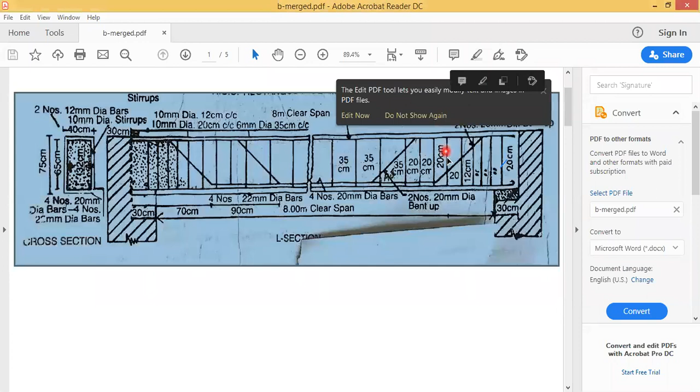And for the remaining length, it's 350. So for 350, you have to calculate how many numbers of bars are there. You can't count because they have shown a continuity symbol, and whatever number I have counted, that is only for one side. For the other side, you can multiply by 2.

Now come to this cross section. Total depth is 750 mm, and to the center of the diameter, or leaving the cover, it is 650 mm. So what will be the top and bottom cover? It will be 50, 50 at the top and bottom, so that you get 75 total.

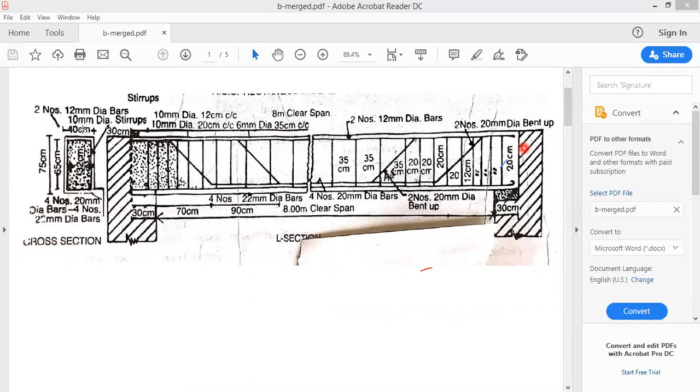And then breadth is 400 mm, and inside you can see 32 they have written, so that means cover is 40 minus 32, you get 8. So distribute on either side, it is 4. 4 centimeter means 40 mm it is. So top and bottom cover is 50. Side covers are 40 mm.

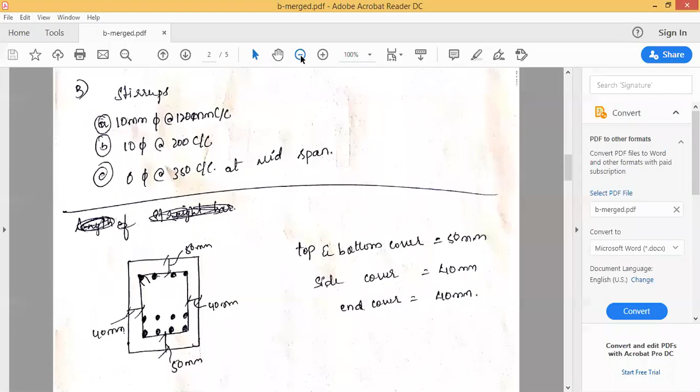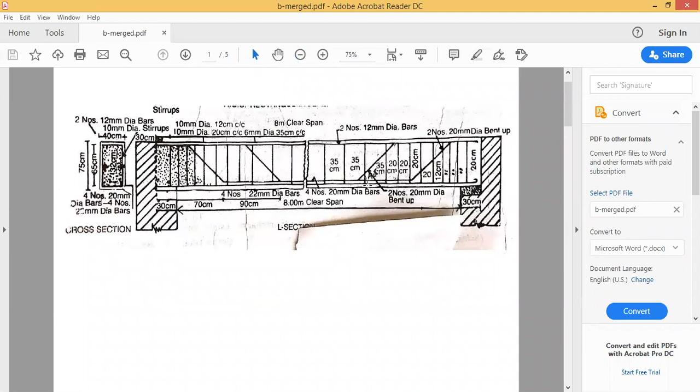Next, we shall see types of bars. I told you the main bar is a straight bar at the bottom, 4 number of 22 dia, and bent up bars, 4 number of 20 dia. It may be bent up at different distances, but it is bent up within this beam only. So if you calculate one bent up bar, you can multiply it by 4.

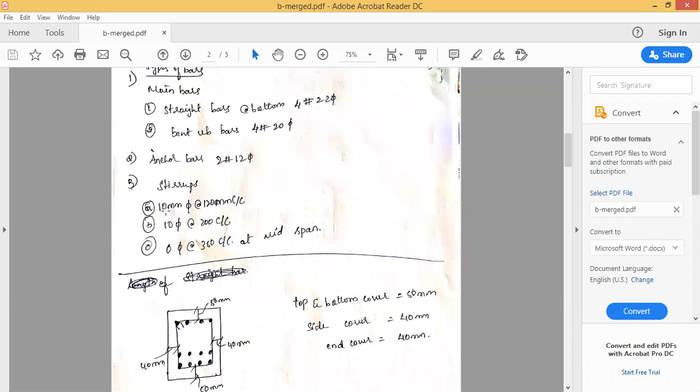And then we have anchor bars, 2 number of 12 dia, which is at the top. And then stirrups, again spaced at different spacing, and the dia is also different. 10 mm dia at 120 mm center, that is here. Then again 10 dia at 200 center, and here it is 6 dia at 350 mm center to center. So here they have given the dia of the stirrups: 10 dia at 12 centimeter center to center, 10 dia at 20 centimeter, and 6 dia at 350 center to center. So you can see the dia of the bars and spacing here.

Now this is the figure. So top and bottom cover in cross section is 50, 50, and side cover is 40, also called end cover as 40 mm. This problem is in Datta textbook, page number 232.

First, let's calculate the length of the straight bar. There are 4 number of 22 dia. I have directly written here, not used a formula. I think you're familiar now with this.

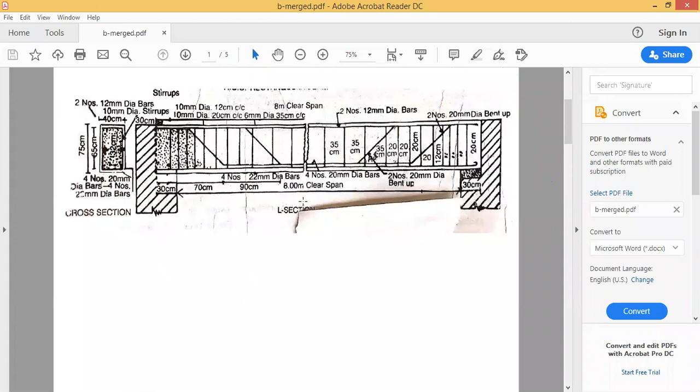So length equals spacing, clear span is 8,000, plus bearing which is 300 on either side. You can see it is 30 centimeter, 30 centimeter, so it is 300 on both sides. What I did is 8,000 plus 300 plus 300.

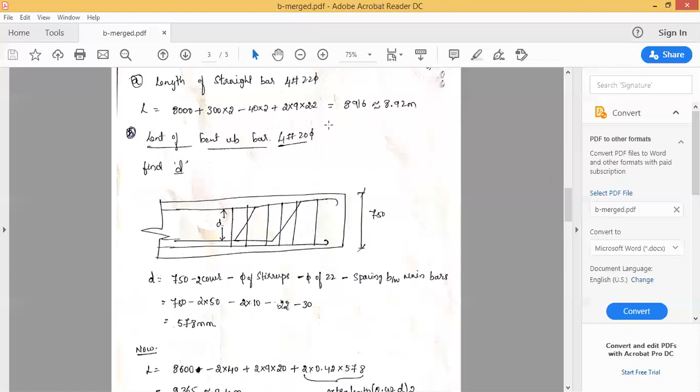And then what is this 40 into 2? This is the cover, side cover. So 40 is the cover, and we have 2 ends, 40 into 2, and plus hook length. Hook length is 180 degree. 180 degree hook length is 2 times of 9 dia. Diameter is 22, so I have taken 22. So you will get length as 8916, approximately 8.92 meter.

Then you have to calculate the length of the bent up bar first. There are 4 number of 20 dia. First you have to calculate this D. Be careful, see where this bar is bent up. One side the diagram I have written.

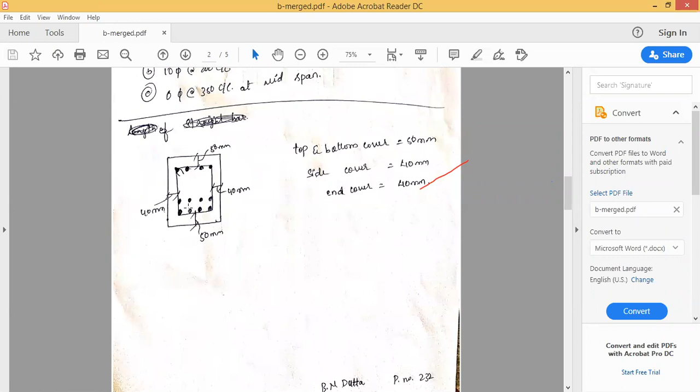Where this bar is bent up, there is a space between the bottom bar and the bent up bar at the bottom. You can't provide all 4 numbers at the bottom because in the cross section you already have 4 numbers at 22 dia at the bottom, and you can't provide again 4 numbers of 20 dia. That's why they are placed above this, provided in 2 layers.

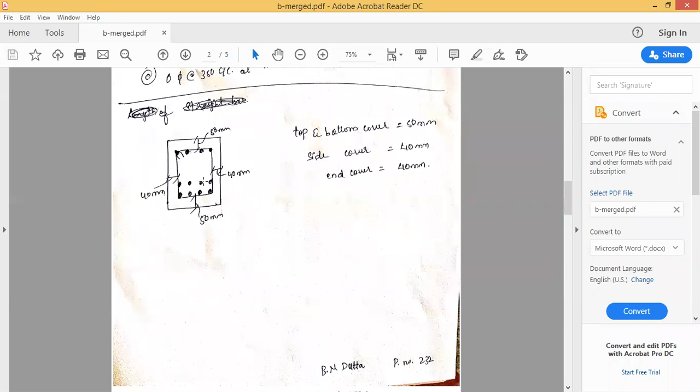So there is a distance between these two. You have to calculate d. How do you calculate? Take the overall depth, so 750 minus top and bottom cover.

So 2 times of cover minus, here there are stirrups. The stirrup diameter will be there at both top and bottom, and there are 2 dia of stirrups: one is 6 dia and another is 12... sorry, 10 dia. So first check whether this bent up bar is in the 10 dia bar or in the 6 dia bar stirrups. Let us see in the figure.

See here, it is 6 dia and here it is 10 dia. So what I will do is take 10 dia, this is 10 dia of stirrups. I will deduct the dia as 10 diameter.

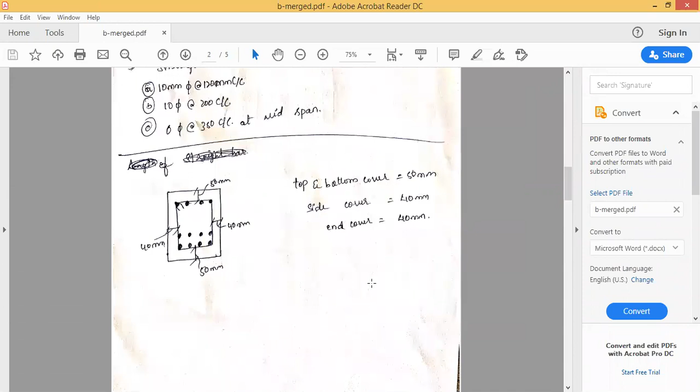So deduct the dia of the stirrups. I have deducted the dia of the stirrups and then 2 times of, sorry, dia of the 22 bar dia. Main bar dia is also there. You have to deduct the dia of this main bar, dia of the stirrups here, and then there is a spacing between the main bars.

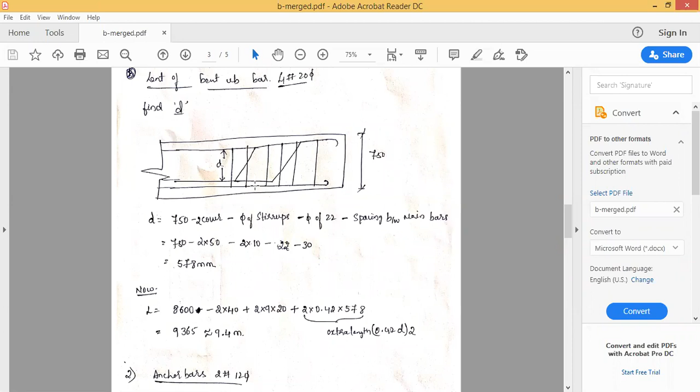This spacing between the bars, whatever is there, you should deduct. So I took dia of 22, this is the main bar diameter, minus spacing between the bars. This is the spacing between the bar.

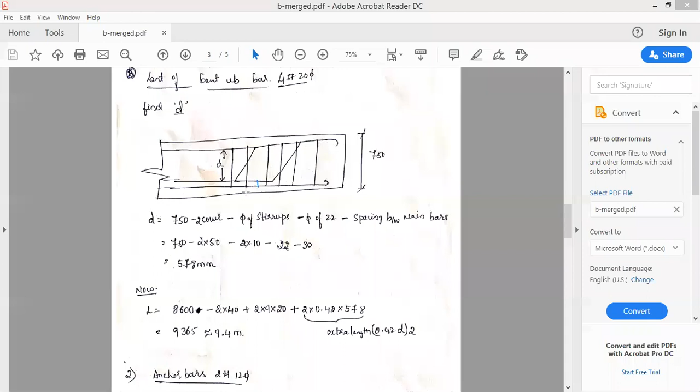If you want, you can take it again to center of this diameter. So if I do so, it is 750 total overall depth, minus 2 times of cover (top and bottom cover), and then 2 times of 10 dia. 10 dia is the stirrup diameter because we have stirrups here which are tied to the main bars. So some depth will be added.

So you have to deduct that depth. What will be the depth? That is the diameter only - diameter of the stirrups, top and bottom, 2 stirrups, 2 dia, and then dia of the main bar because stirrups are tied to the main bars, minus 22 diameter, minus spacing between these two. See why I have taken it as 30.

You know this diameter is 20, so this is 22 and this is 20. The spacing should be minimum of the diameter of the bar, or else the maximum size of aggregate which can accommodate the space between these two bars. The maximum size of aggregate used in construction of beams is 20 mm, so it should be more than 20 mm, and here you have 22 mm. So you can take 22, or else you can take a still higher value - there is no problem. So I have taken 30 here.

So then I will get d as 578 mm. Now calculate the length. Length is equal to - see in the previous problems I used to tell you that the bent up bar is just like a straight bar, but some extra length is required.

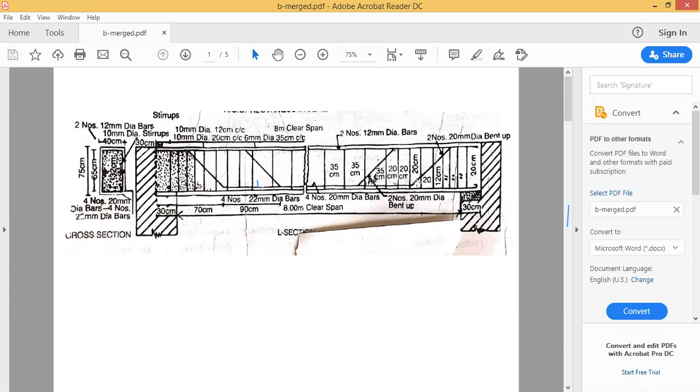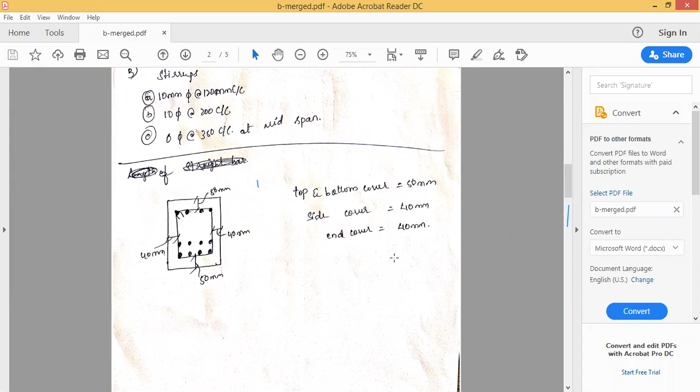But here the diameters are different. The main straight bar diameter is 22, the bent up bar diameter is 20, so you can't take that value. Only when the diameters are same can you go for that concept, just adding the extra length. But here you can't do that because of the different diameter. So what I will do is use the formula: total length equals span plus bearing minus end cover, plus hook length which I have already added, plus the extra length.

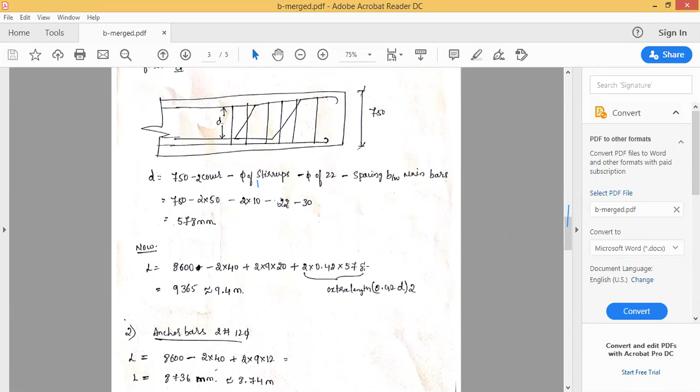We have 2 bent up bars. One is on the right end, the other one is on the left end. So it is 2 into 0.42 times of D. D is 578. If you do so, you will get 9365, which is equal to 9.4 meter.

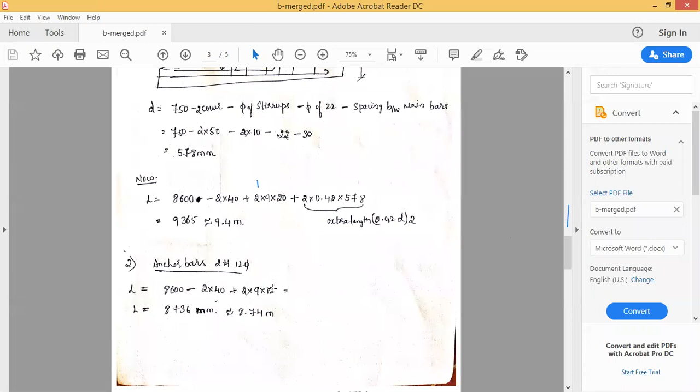There are 4 number of bent up bars. Then anchor bars. Anchor bars are at the top, so 2 number of 12 dia are there. So L is equals to 8600 minus end cover plus 2 times of 9 times of diameter. Diameter is 12. We'll get 8736 mm, which is equal to 8.74 meter.

Next thing is you have to calculate stirrup length. See, stirrup spacing is different and diameter is different, but length of the stirrups will remain same. If you take to the center of the diameter of the stirrups, then there will be small verification variation. But what I will do is I will neglect the center diameter. I will calculate this total length. So length of the stirrups is same for everything.

Here the length will be different, because if it is 10 diameter it is different, if it's 6 diameter there is a slight difference. You can do this procedure even for the 6 diameter.

So first I will calculate B and D. You know that total depth is 750 and breadth is 400. Top cover 50, bottom cover 50, side cover 40. So I will calculate B and D. B is equals to total 400 minus 2 times of side cover, 2 times of 40, you will get 320. And D is 750 minus 50 into 2, you will get 650. I will substitute this.

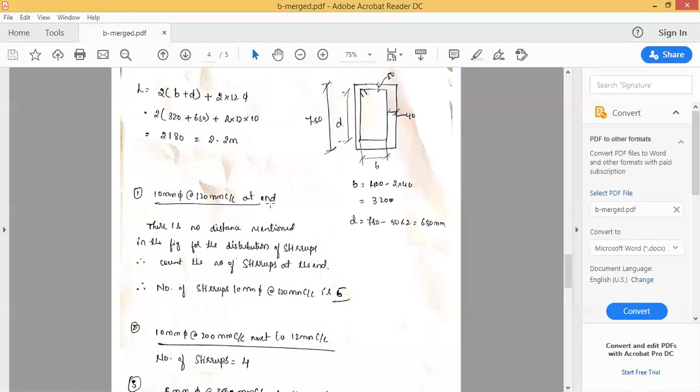Then we have to calculate number of stirrups. So 10 mm dia bars at 120 mm center to center are provided at the end. There is no proper spacing or proper length of the beam given to calculate this number of stirrups directly. If they had mentioned, like up to 200 mm the spacing is this much, up to 400 mm the spacing is this much, then we would have calculated. But they are not mentioned for any distance of spacing. So what I will do is I will count the number of bars here.

So for 120 mm spacing, I will count it: start from the end, 1, 2, 3, 4, 5. So there are 5 numbers placed at 120 center to center. Then we shall see 200 center to center, how many bars are there. Leave this bar, start from next: 1, 2, 3, 4. So 4 number of bars are placed at 200 center to center, and the same thing is repeated on the other end also. So what we have to do is 4 into 2 and 5 into 2.

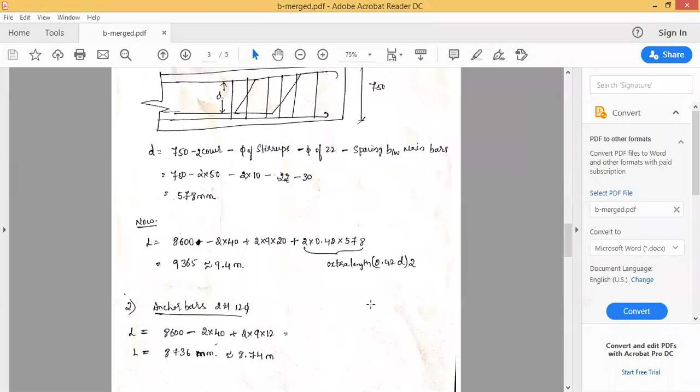So I've given the explanation here: 10 dia bars placed at 120 mm center to center is 5. Similarly, those placed at 200 mm center to center - sorry, it's supposed to be 120 dia - is 4 numbers.

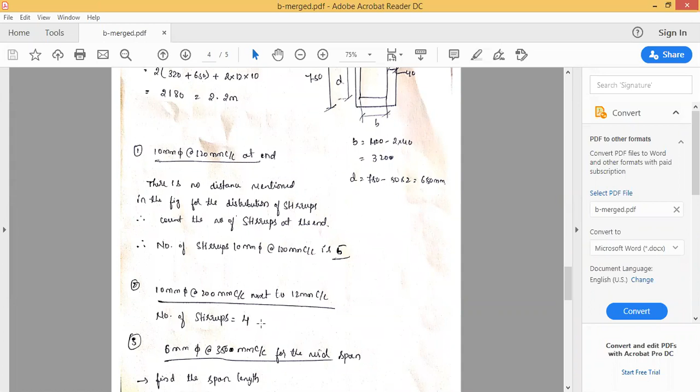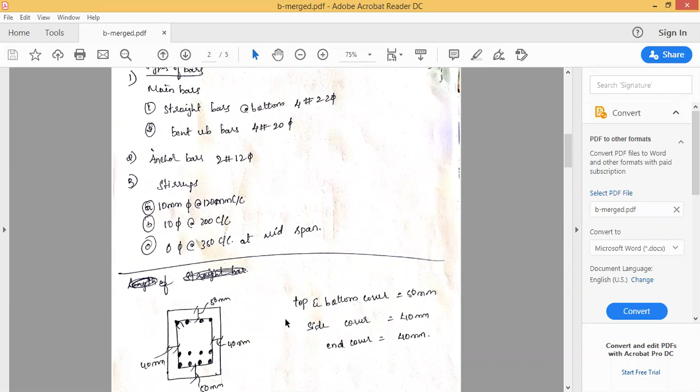So now 6 mm dia bars at 350 mm center to center for the mid span. See, they are placed at mid span. These bars at 350 mm center to center are placed at mid span, and span is more, and also they have shown a continuity symbol. Here what you have to do is calculate the total length, find out the length and then divide it by the spacing. So how will you find out the length? Simple.

Take the overall length of the beam, deduct the cover, and deduct this 20 centimeter for which stirrups are not provided - 20 centimeter on both sides, or 200 mm. Take the overall length of the beam, deduct side cover on both sides, deduct this 200 mm on both sides, and then count how many spaces there are with 120 spacing.

So bars at 120 spacing are 5 in number, but what is the number of spacings between them? Sorry, let me repeat - number of bars placed at 120 spacing is 5. But how many spacings are there? Between 5 bars you have 4 spacings.

See, 5 bars are there, right? So what is the spacing here? 1, 2, 3, 4 - we have 4 spacings. You have to calculate the 4 spacing. 4 spacing into what is the distance? It is 120 - multiply that. Then come to 200 - how many spacings are there? 1, 2, 3, 4 - here also we get 4 spacings. 4 into 200 you have to do.

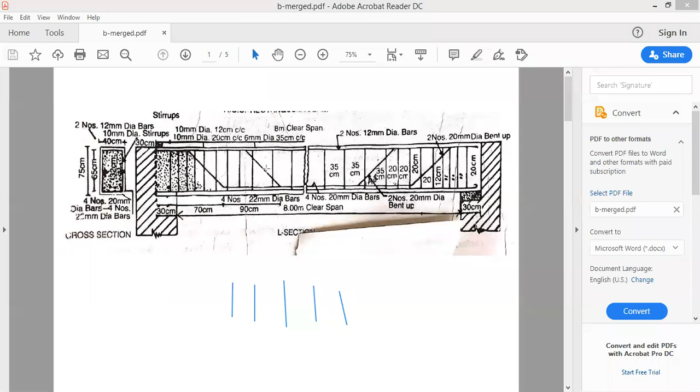So you will get the entire length of this, multiply this with 2, and you will get this also. Then deduct that with 8600. You will get the mid span. I hope you understood.

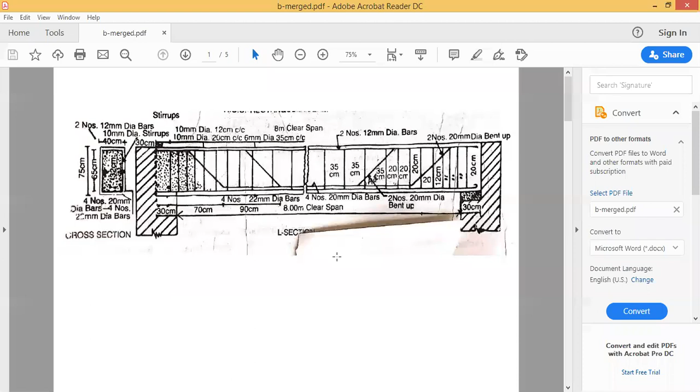Ma'am, it is given there 70 centimeter and 90 centimeter - can we deduct directly? No ma'am, no no no. What they have given is where the bar is bent up. You can see here it is 90 centimeter, but after 90 centimeter also it is 350 mm center. Can you see here? Yeah ma'am. That's why you have to calculate this spacing separately and deduct it from the total length. This problem is a little bit confusing. You have to use all your knowledge to solve this problem. Okay, I will move on.

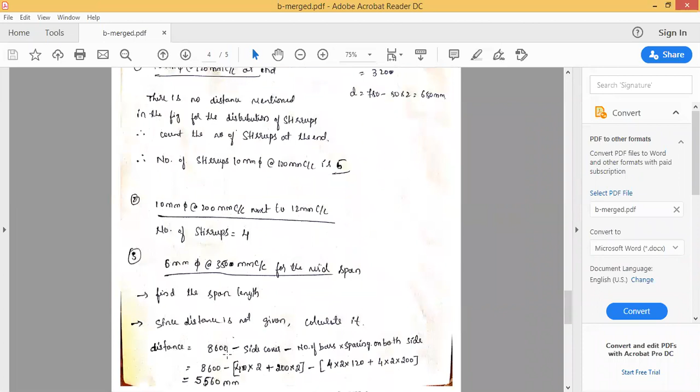6 mm dia bars are placed at 350 center. What I did is I took the overall total length of the bar beam. It is 8600 minus side cover, minus number of bars into spacing on both sides. So it is 8600 minus 40 into 2, which is the side cover on both sides, plus 200 into 2. What is this 200 into 2? It is the space for which stirrups are not provided.

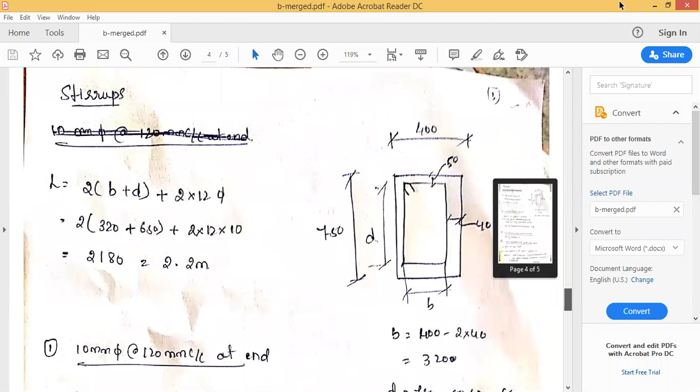If you go here, see, can you see this 20 centimeter? This is from here to here. So this distance you have to take. So it is 200.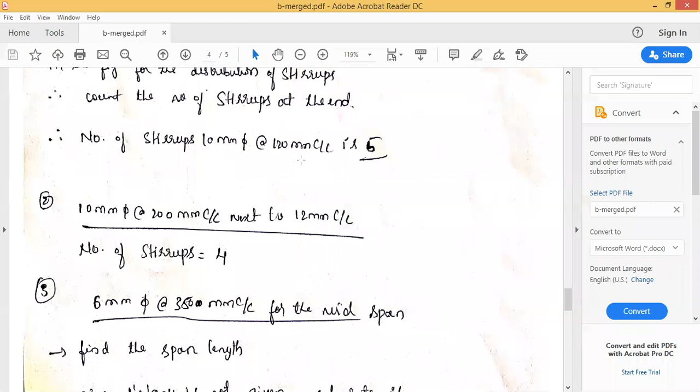So side cover is 40 into 2 plus 200 into 2, minus number of bars. I told you about 120 spacing - 4 number of bars are there and there are 2 sides, right side and left side. So I have taken 4 number of bars into 2 sides into 120 spacing, plus 1 more spacing - 4 number of bars and 2 sides into 200 spacing. If you do this, you will get 5560. So for this length, 350 mm stirrups are placed.

Now put the formula to calculate the number of stirrups, that is 6 mm dia stirrups. Number of stirrups equals span by spacing plus 1. So span is 5560 by 350 plus 1. You will get approximately 17 numbers.

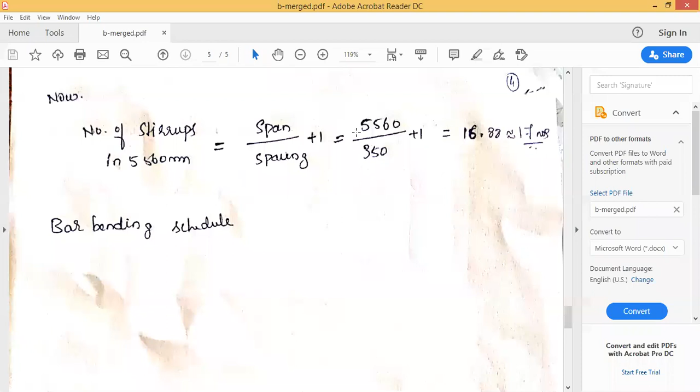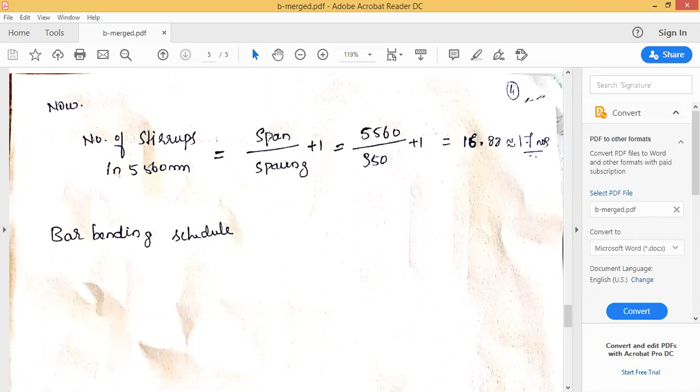So you have to do the bar bending schedule. Here I have not deducted the cover and all because it is in the mid span, so directly I used this formula. That's why I calculated it separately - that distance, span distance, I calculated here. That's why I substituted directly 5560. In previous problems I used to calculate the span here, right - total span minus cover like that. But here I calculated separately, and that I'm substituting here.

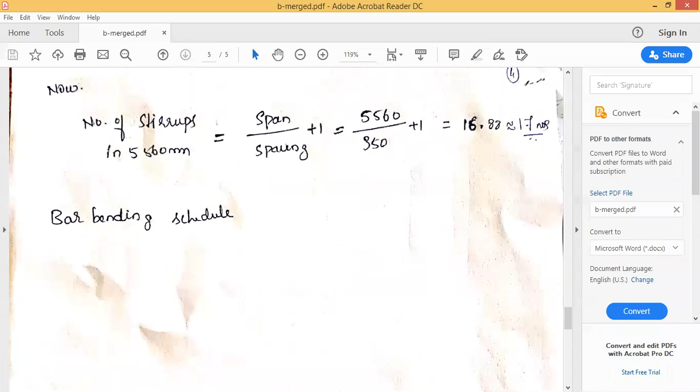Any doubts you have? Ma'am, while calculating the stirrup B and D, you have not subtracted the diameter of the stirrup. I have not subtracted - if you want, you can do it. That is not something too major, it is just a small diameter. So anyway, even if you estimate, some plus or minus quantity will be there. If you want, you can even deduct the diameter on either side.